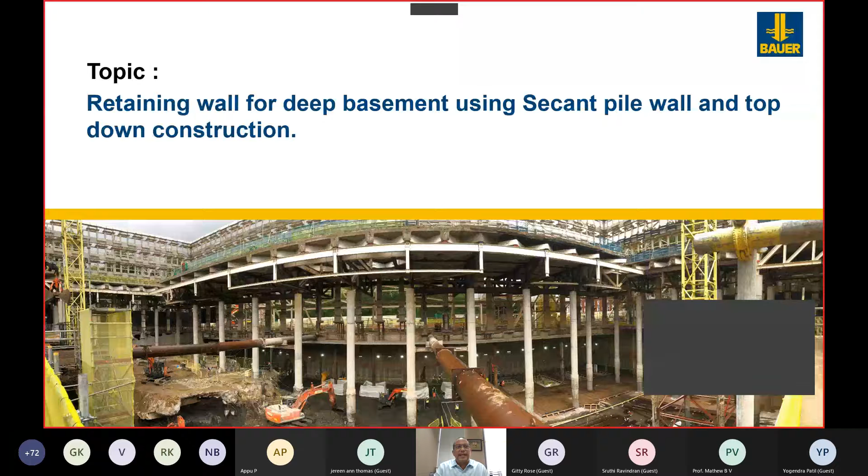For any building, there are two phases: a substructure and a superstructure. The substructure consists of a basement retaining wall and the different floors of the basement, and the superstructure consists of the various floors of the building, which, depending on the height of the building, will keep going up. But the difference is, for a building to go above the ground, the basement works need to be completed in time, and this is the most difficult part of the whole construction process.

This is a time when no overlapping work can be done on site, whereas in the superstructure works, once a few floors are constructed, other works can be started in parallel and overlapping. So the basement construction is a very critical point of the whole construction schedule.

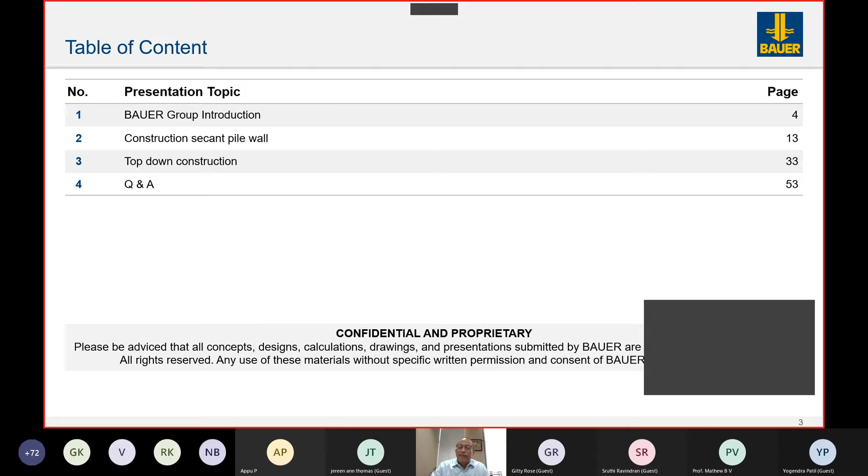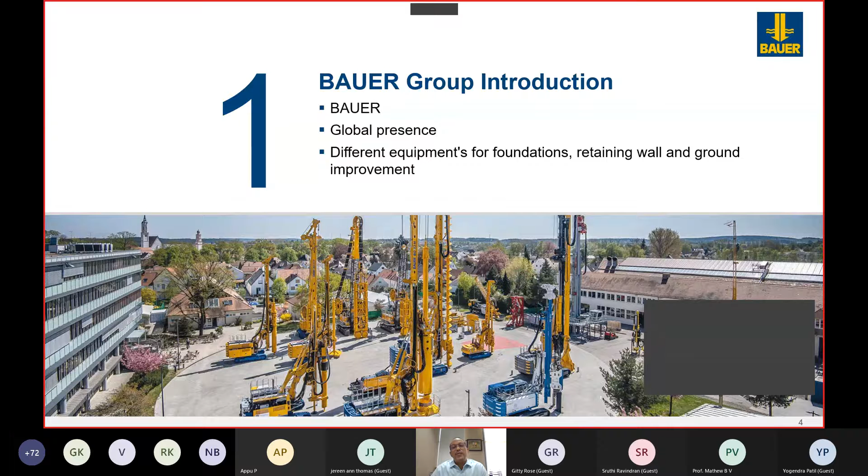For this method of works, very special equipment is needed. One of the companies who is actually very specialized in constructing these kinds of basements and also in the manufacture of similar kinds of equipment needed for these works is this company by the name Bauer. It is based in Germany, and it's almost more than 230 years old because it started in 1790.

It is present in more than 70 countries, having about 11,000 employees from 95 different nationalities. This company has been involved in very big jobs around the world.

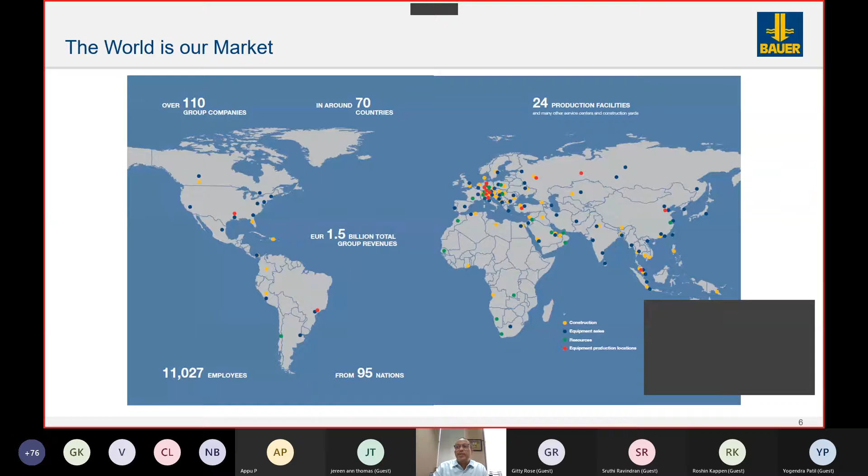To name a few, you can see from the pictures, starting from our neighborhood in Kuala Lumpur, from the Petronas Towers, all the way to Burj Khalifa, which at the moment is the tallest building in the world. And in the very near future, it will be overtaken by the Jeddah Tower in Saudi Arabia, which is 1,001 meters. All these buildings are founded on piles done by Bauer, very deep piles, 100 to 150 meters, 120 meters, of diameters 2.5 to 3.5 meters.

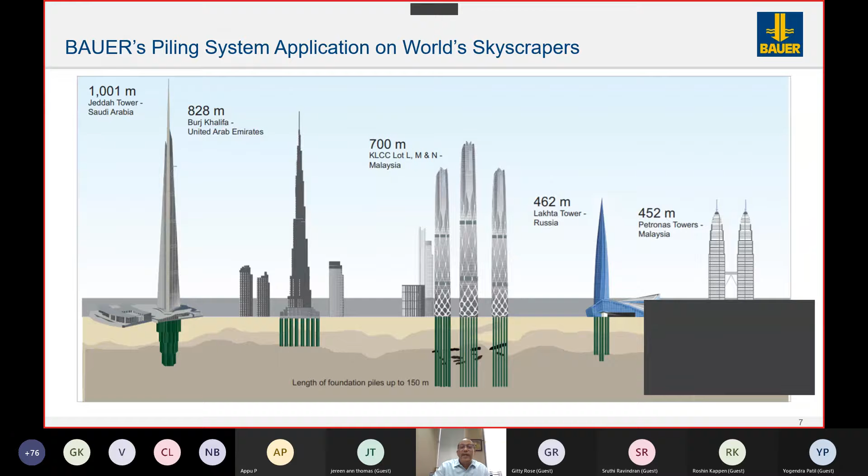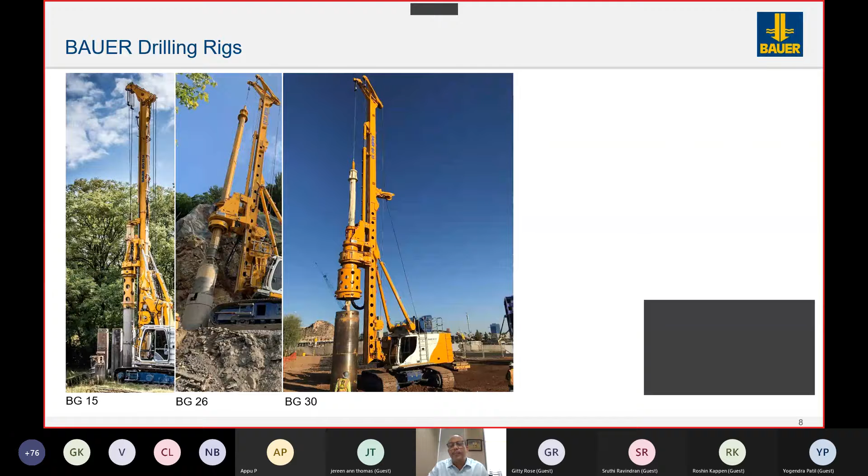Some of the equipment used in this kind of construction, and especially for the topic we are going to discuss for the basement wall construction, are the drilling rigs. The basement wall can be constructed using interlocking piles, contiguous piles, or diaphragm wall, and for this, special kinds of equipment are needed.

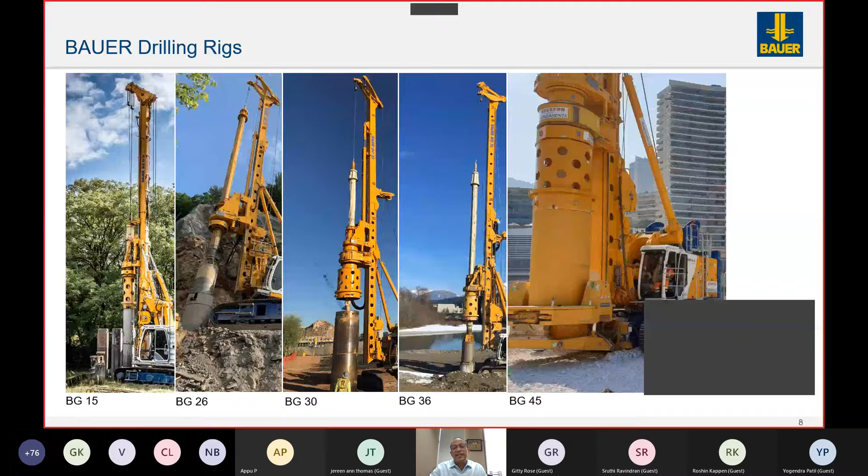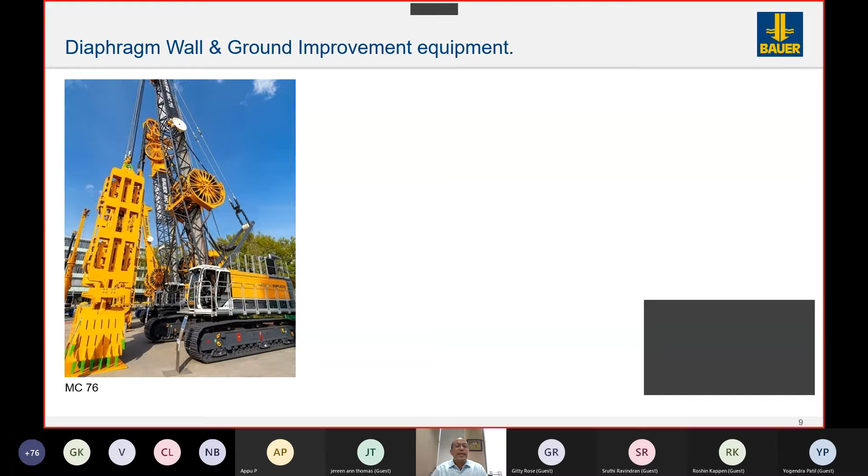These are the pictures of the drilling rigs which are normally used for the bored piles and the secant piles. And these pictures coming up are for the diaphragm wall, which is also another kind of basement wall using a grab or a cutter when you have hard material. This is another equipment used for ground improvement, shown here just for general information.

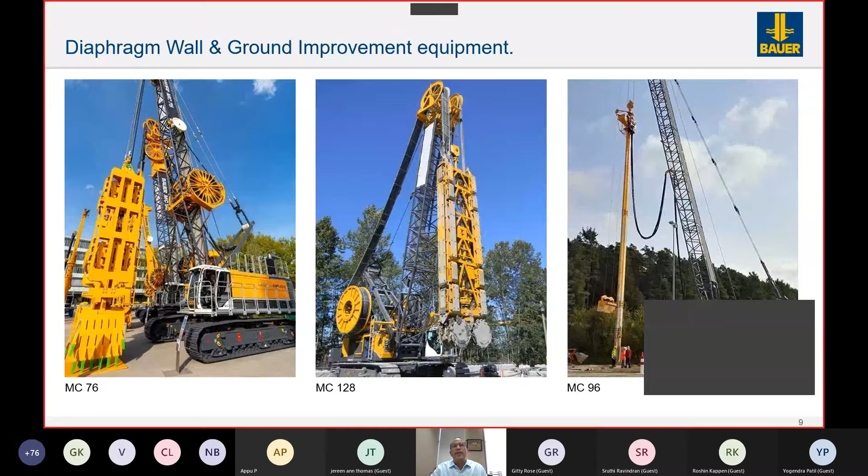So we quickly move on to the second part of the presentation, which is the construction of the secant pile. In the past, most of the basements are constructed using...

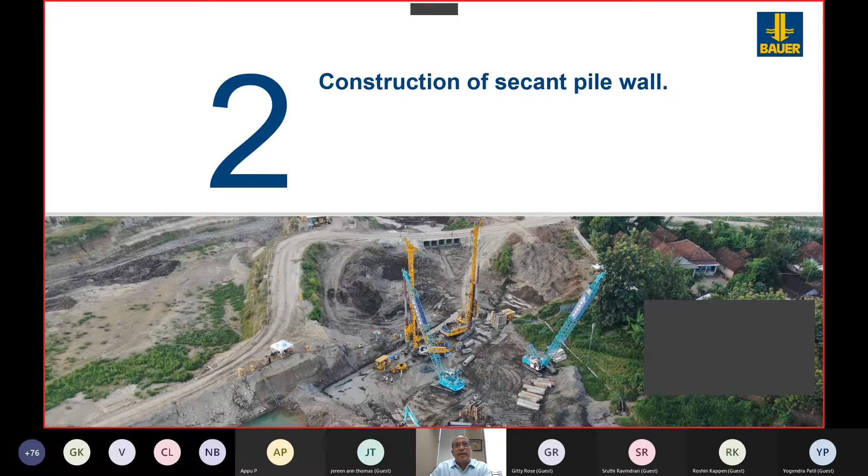Before I move on, I have to highlight that this presentation is purely from a construction perspective, covering the various steps involved. The retaining wall is made up of different kinds of piles or diaphragm wall, as mentioned earlier.

Soldier piles are used when the soil is relatively in good condition, where you can space the piles with a gap in between, and the gap is then supported by shotcrete or any kind of cement plastering.

If the soil is not really good, then we could also use contiguous piles, which are placed close to each other, but then you have the problem of water flowing through between the piles.

The topic we are going to discuss is secant piles, where the retaining wall is made up of interlocking piles built in a particular way, having unreinforced piles and reinforced piles.

In an urban landscape where land value is going through the roof, the developer needs to make use of his land as much as possible. Especially in big cities, this is made possible by building basements and also going taller, to whatever number of floors we are at nowadays, in the range of 60 to 70 floors per building. So for basements, we can also go deeper depending on the soil conditions and the design.

In this presentation, in the second part, we will focus on a particular way of constructing a basement wall, which is called secant piles. And in the third part, we will also discuss how a basement is excavated, which is slightly different from the traditional way of excavation.

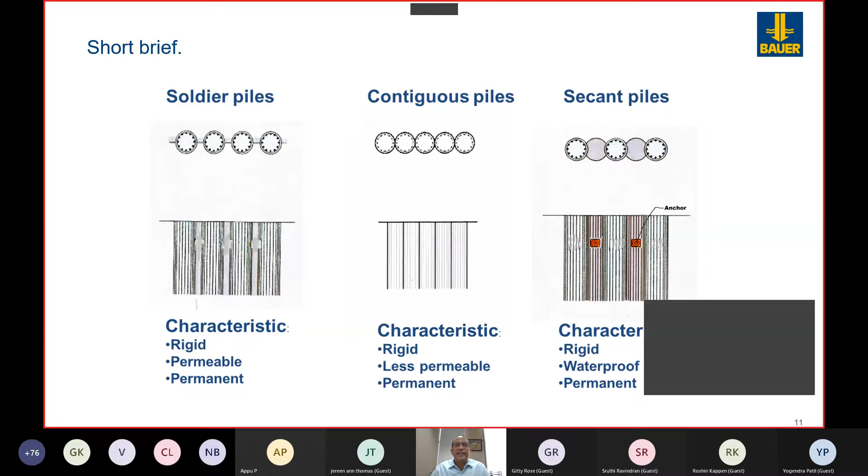So for a secant pile, it is basically built having a combination of piles interlocking each other, and the process happens in two different ways. First, the piles are drilled and cast without reinforcement, but with a certain space in between, and they are constructed for a few numbers in a sequence, all of them unreinforced.

Later on, after one or two days, when the concrete has reached its first setting strength, the equipment comes back and drills another pile in between the two already cast primary piles by overcutting into each other, thereby forming the interlocking system. These piles have reinforcement.

So once the wall is completed, this combination of interlocking piles, unreinforced and reinforced, will form a monolithic wall, which then will be topped off by a capping beam.

In certain structures like a jetty wall or quay wall, used in harbors where ships are docking, sometimes the excavation in front is very deep because of the dredging depth needed for the draft of the ships.

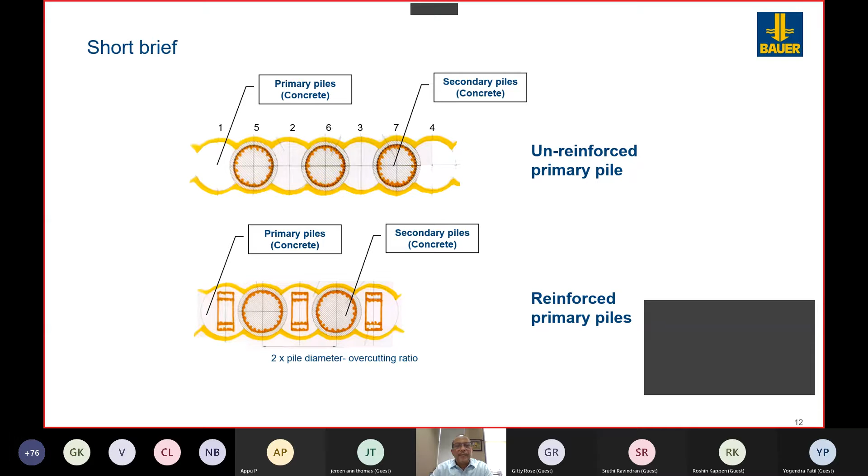In this case, the possibility of providing reinforcement on the primary piles is also done by having a specially designed cage in a different shape. This is because when you're overcutting the secondary piles, you need to make sure the steel cage already installed in the primary piles is not disturbed.

So we will go into the step-by-step process of constructing a secant pile. It consists of mainly four or five steps.

The first step is to make a guide wall, and I will go into the detail of all these steps. The second step is the drilling. Once the piles are drilled to the required design length, the cleaning is done. If it's a primary pile, it's followed by concreting. If it's a secondary pile, we have the installation of the steel cage followed by concreting. So it's very similar drilling for both piles, but slightly different in the equipment used and in alternating reinforced and unreinforced piles.

So we go into the details of each and every step that has just been mentioned.

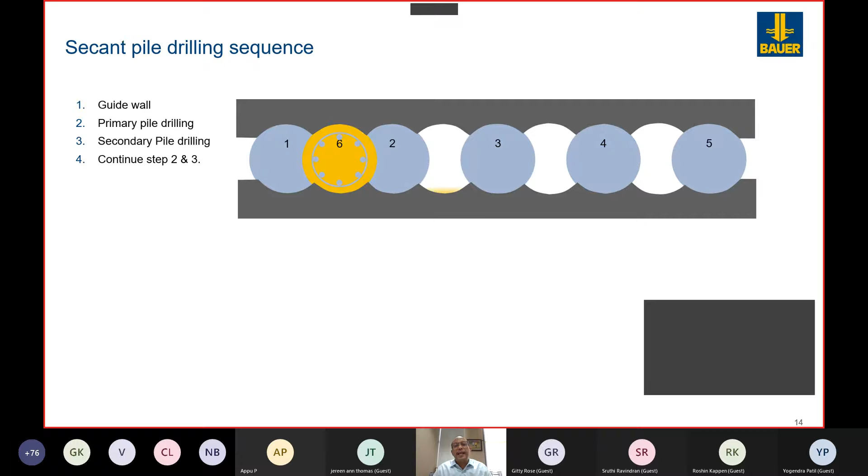A secant pile needs a guide wall, primarily to control the alignment of the piles. When you have a basement wall on the edge of your property, it's very important that it is built in the correct alignment.

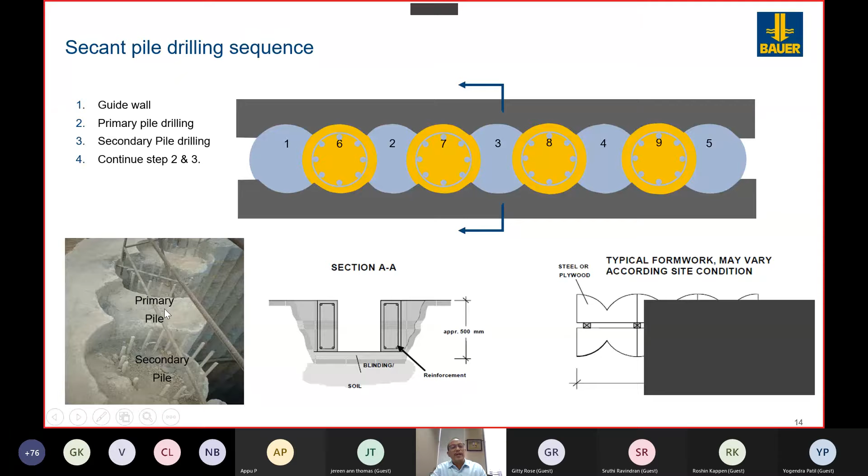How does the construction of a guide wall start? The guide wall mainly starts with excavation, followed by plain concrete, and then reinforcement placed in certain designed ways depending on the loading needed on the guide wall, and then the formwork is done.

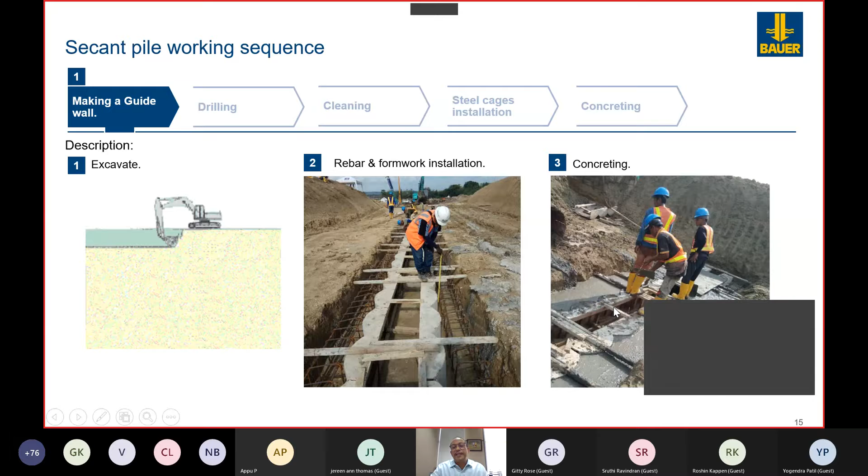The formwork is shaped so that when removed, it forms arcs into which the future casings for drilling will be inserted. This is the guide wall which has just been cast, and you can see how a guide wall looks after the formwork has been removed.

This way you can see the alignment of the wall is perfect. Each and every position of the pile is defined and numbered, so there is no confusion for the site team. They know exactly which pile is in which position.

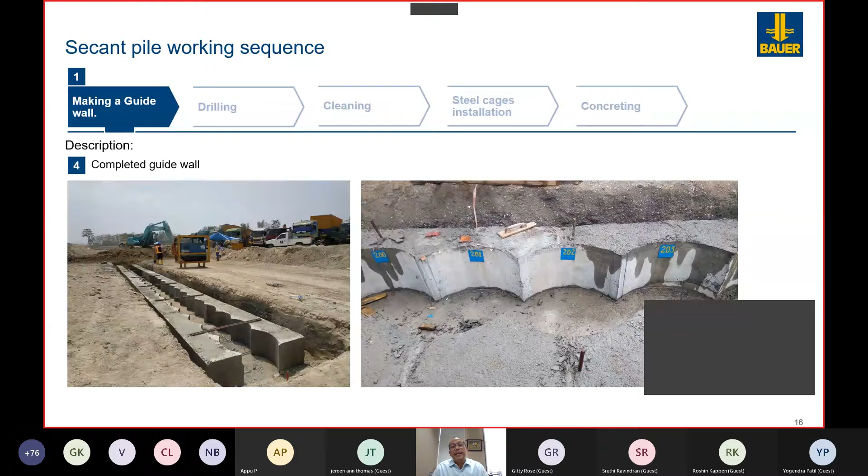Normally the odd numbers are the primary piles - 1, 3, 5, 7 - and the even numbers are the secondary piles. So whenever you see an odd number, you know it's a primary pile. As mentioned earlier, we construct a few primary piles in a line and then come back and do the secondary piles.

The drilling process is done using a special type of casing which has a double wall. The double wall is because it is constructed of two tubes, one inside the other, with stiffeners in between. On top and bottom, there is a male and female coupling welded onto these tubes. The advantage of these couplings on both sides is that casings can be joined and extended as needed, depending on soil conditions.

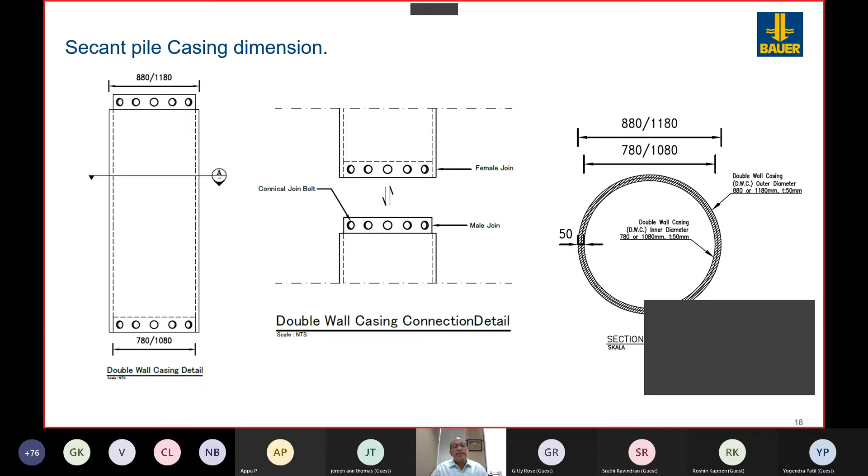As a thumb rule, in our projects the pile is drilled fully cased until the excavation depth is reached, by extending the casing piece by piece. After a certain stage below the excavation depth, when good soil is reached, drilling is continued without the casing, but the overlapping will still be done.

The drilling rig exerts the power to install the casings and later for drilling, from the gearbox. The power from the gearbox is translated to the casings through a special equipment called an adapter, which is fixed to the casings using pins.

Once these pins are fixed, the rig pushes the casing into the ground and rotates at the same time until the full length of the casing has been pushed down. Once the casing is in the ground, the pins are removed, and drilling starts.

The drilling will only continue until the toe of the casing - it will never go beyond the casing depth. The advantage is you avoid the chances of collapse, which is a very big factor for a basement wall, because a collapse causes concrete bulging and a lot of repair work later.

The second step of drilling is to join the next piece of casing using the screws or holes, which I'll detail later. This male and female coupling allows us to join casings using special screws, and by using the power of the rig, it can be pushed to a depth of about 20 to 30 meters depending on soil conditions and basement excavation.

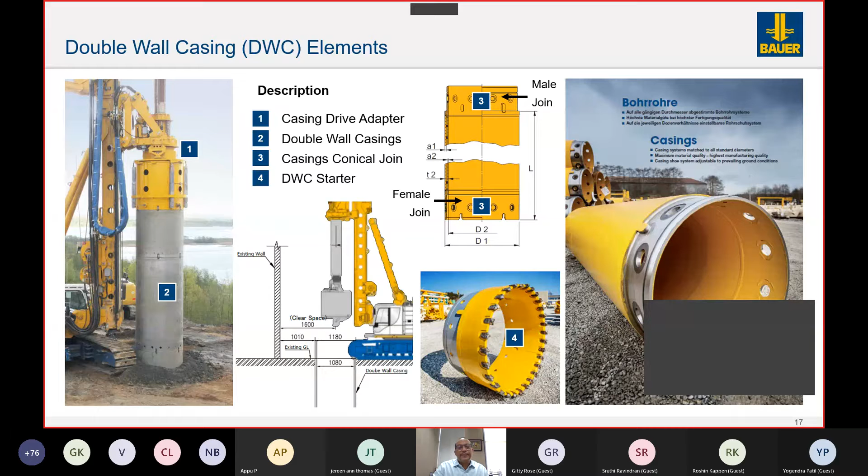So the process of drilling starts. Now that I've explained the importance of this casing and how it is structured - this first picture shows a rig about to start drilling. It is already hanging the casing after fixing it with the pins. It will be pushed into the hole in the guide wall.

Before that, verticality checks are done. All this equipment made by Bauer has inclinometers built into the cabin, so the operator is very clear about the verticality of the mast and also the casing. As an additional feature, workers also check the mast's verticality using a spirit level - that is what you see happening now.

In the second picture, you see the first casing has already been pushed down into the ground and the second casing is placed on top.

So the holes you have seen are for the screws where you will join the two casings using the conical screws. And again, the verticality check is done before the drilling is continued. In this way, the drilling is continued to the design depth.

The casings are pushed down to whatever length is already determined, depending on the excavation and also on the soil conditions. The advantage, again, is the drilling is always done within the casing, so there is no possibility of collapse, which enhances the quality of a basement wall.

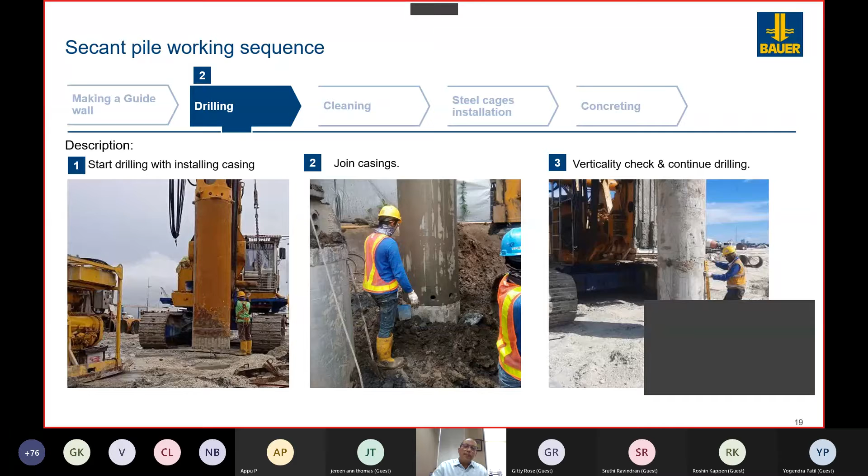But after you drill, we need to make sure the pile is vertical or the hole is vertical, whether it's a primary or a secondary. The drilling process is the same for a primary and secondary, except that the secondary has a slower drilling progress.

Because the primary pile on either side of this particular secondary has to be overcut. So the cutting of concrete by that special shoe, what you have seen in the earlier picture, takes more time than for the primary pile, because for the primary pile you are just drilling into normal soil. For the secondary pile, you have to drill into normal soil as well as cut the neighboring piles to get you the interlocking action.

So the drilling process of a primary and a secondary is the same. Once the drilling is completed, special equipment called Koden is used. This was also covered in one of the first sessions I attended in this FDP program. There was one very good session on different kinds of sensors being used for monitoring the deflections of the wall, building, and so many other things.

And this is also another use of that kind of sensor, because in this Koden machine, as the sensor portion is lowered into the ground, the results are transmitted to a computer, which you can read directly and even take a printout, which will show you exactly how the hole is looking, whether it is inclined, whether it is vertical, and whether there are any collapses already happened or not.

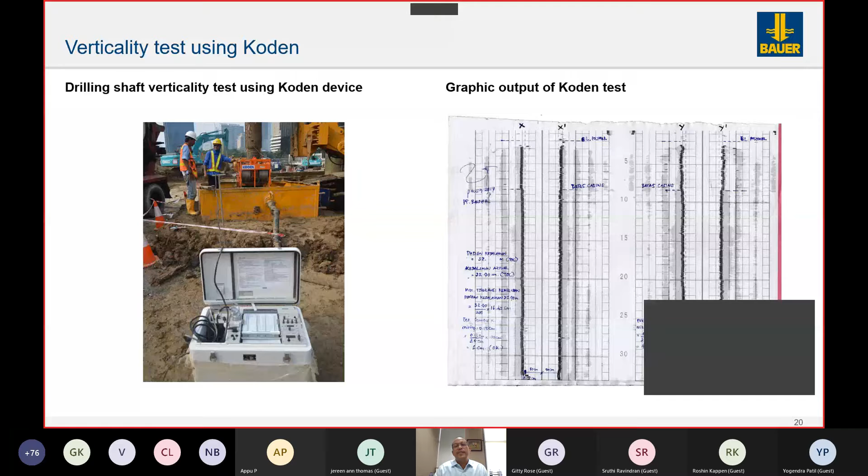So once verticality is checked, then you have to make sure the toe of the pile is clean, because during the drilling, a lot of debris would have collected at the bottom of the pile, which is the toe of the pile. This is very important, especially in bored piles, if you have end-bearing structures, you need the base to be very clean so that the designed carrying capacity is achieved.

For the retaining wall, the end bearing is not so important, but still it is not allowed to have so much debris at the bottom of the hole. There are two ways of cleaning the bottom of a hole.

One is the first picture, which is a bucket, a drilling bucket or cleaning bucket, which when lowered into the ground to the final level and rotated, has a bottom plate, a flat plate, which will push all the debris into this bucket. Then this bucket can be rotated in the anti-clockwise direction and locked, and you can pull up the bucket, so all the debris inside comes up and is disposed outside. You do this a few times, and you get a relatively clean base.

But sometimes, depending on the soil conditions, you might need to do an extra process called the airlift process. This way you actually clean out almost 95% of the fine material collected at the bottom. Airlift, I need to explain in a separate slide.

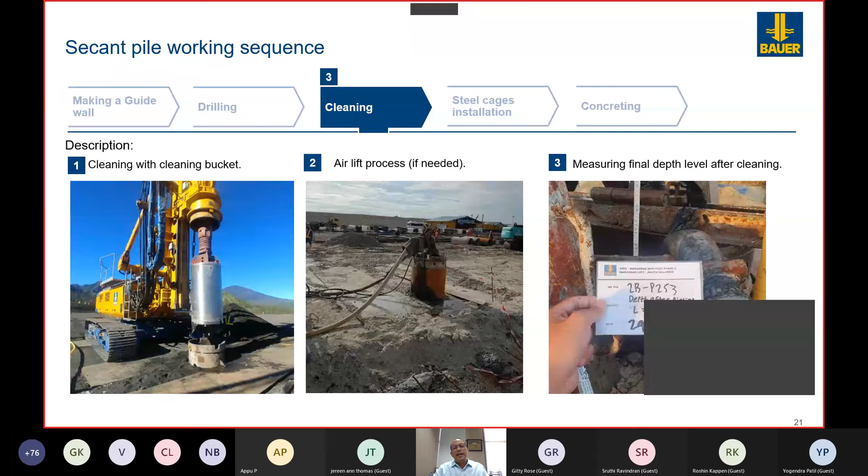Airlift is just that you lower some pipes after the drilling is completed. You lower some pipes along with the air hose right to the bottom of the hole. The air hose is connected to a compressor, and once all the pipes are in place and the disposal lines are set up, the compressor starts working and blows air through this hose to the bottom, into the pipe.

So that air will start pulling up water from the bottom to the outside and start dispersing it to the disposal lines. While this is happening, it's very important that you keep topping up the water or the slurry to maintain the hydrostatic force inside the shaft. Otherwise, collapse happens.

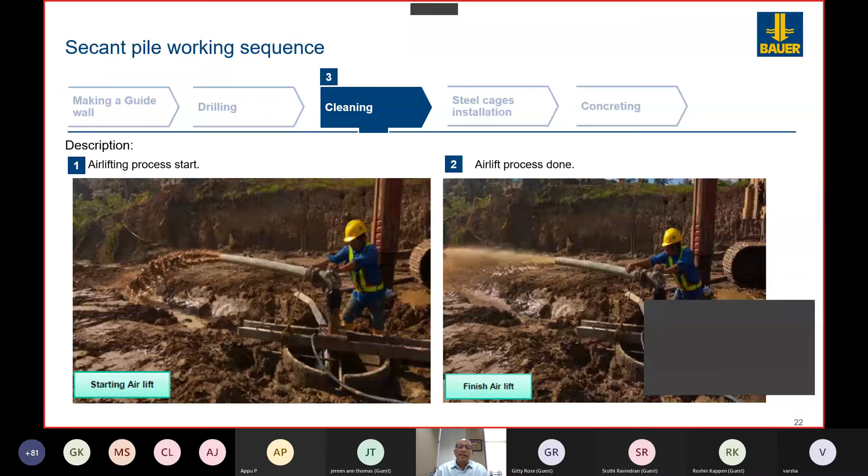This picture illustrates a very clear difference between the starting of the airlift system, where the water is brown color almost, and near finishing, you can see how much the water color has changed, which indicates that the bottom of the hole has been cleaned very well. This is one of the best ways of cleaning the bottom of a pile or any drilled shaft, if you use the proper kind of compressors and pipes.

If it's a primary pile, after the airlift process or the cleaning process is done, we can go directly to the concreting. If it is a secondary pile, then the next step is the installation of a steel cage.

Prefabricated steel cages in lengths of 12 meters are joined either by welding or by couplers, or another method is by having U-bolts tightening the splice length bars, and lowered piece by piece until the full design cage is lowered. Care is taken to make sure proper spacers are provided at the designed intervals, and also the spacing of the spirals is maintained, because these are very important factors for the movement of the wall.

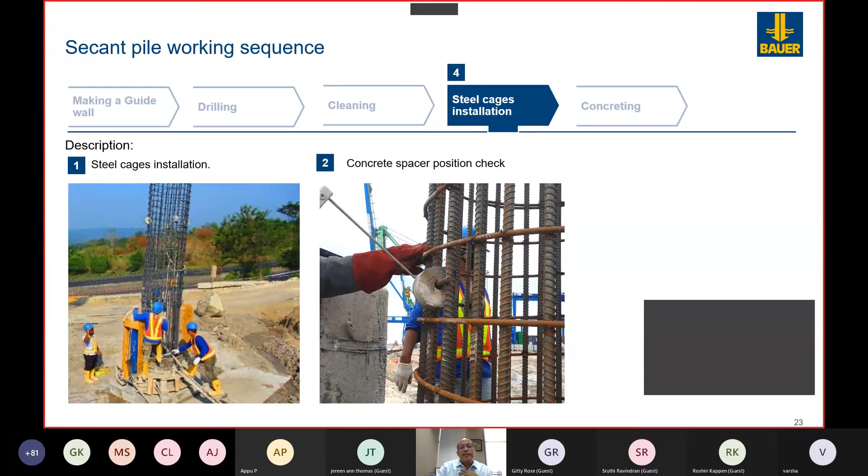If it is a primary pile, as I said, concreting has to be started. If it's a secondary pile, after the reinforcement is lowered, the concreting is started.

In both piles, which are normally drilled under water pressure or stabilizing slurry, concreting is done using a method called tremie-ing. Tremies are nothing but normal pipes having a coupling, male and female, and can be joined piece by piece, which can be lowered all the way to the bottom of the hole. The diameter of the pipe is about 250 millimeters. Once it is lowered all the way to the bottom, on the top part you will have a hopper through which the concrete is poured.

So the concrete trucks which have been ordered by the site management would be on site, and as soon as the tremie lowering is done, the concrete trucks come near to the hole and discharge the concrete directly into the hopper. This is again another place related to the earlier presentation made by a gentleman who spoke about materials, workability, and slump retention.

For concrete using a tremie pipe, it's very important. The word he used was self-compacting concrete. This is one of the places where self-compacting concrete is used. Any concreting done under slurry or water uses self-compacting concrete.

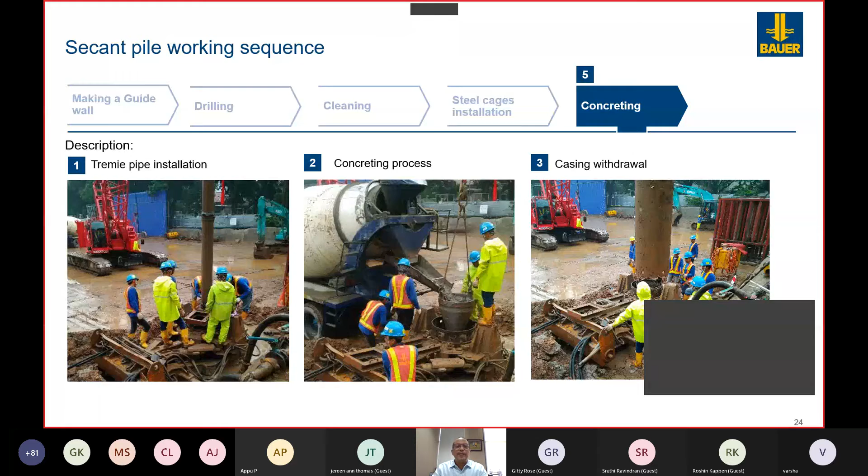In fact, there is a special equipment which is used to extract the casings, which is called an extractor. And how this extractor works, I will show it to you in a video which is coming up.

This extractor is placed before the concreting starts, as you have seen in the other picture. This is where the workers are standing, on top of the extractor. So once the concrete is ready to be cast, the extractor is placed around the casing, and this extractor with hydraulic jacks, which can clamp the casing and pull it up using a special power pack, is used for extracting this special type of casing used for the secant pile.

So this is the video. Can you see the video? Hello? Yes, sir. Yes, sir. Okay.

This is an extractor which is actually pulling up the casing in about 50 centimeter lengths. At the same time, the casing is held by the crane. You can see the sling. And once it reaches above the joint level, the workers will stop the operation of the extractor, open the screws and release the casing, which will be set aside. And then concreting will be continued.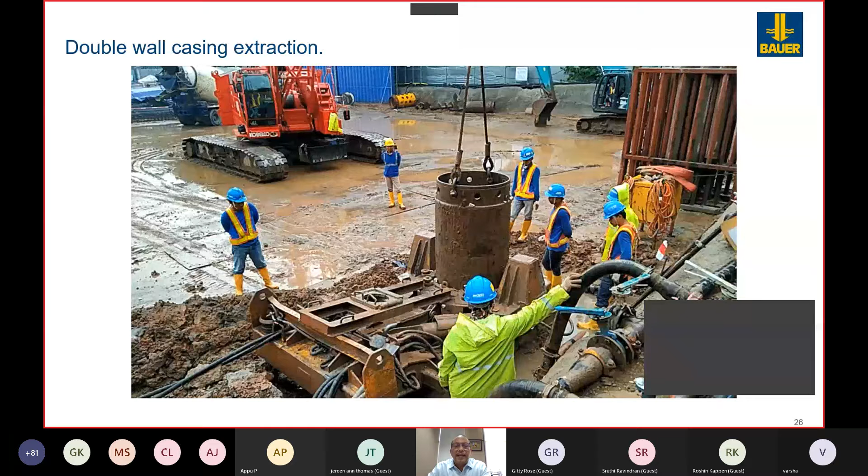So in this way, the primary and the secondary piles are cast by having an interlocking system, and this basement wall is constructed. So this is one of the first steps in terms of basement construction. You need to have a basement wall built along the perimeter of the basement.

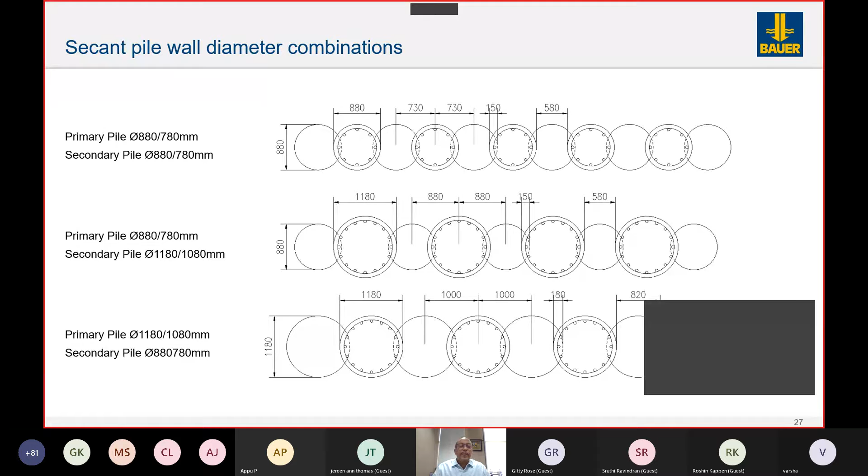So there are three different ways we do it here in Indonesia, but different companies around the world have different diameters available, and that can be designed according to what they have. So this is a very short description of how a secant pile is constructed, and I will now show you some pictures from completed projects to show how a secant pile wall looks after excavation.

The first picture you see is for a pump station which was built in the middle of a river. This was a very challenging project where the water level of the river was above our working platform, so we always had the risk of flooding, and luckily we never had that difficulty because everything went off very smoothly.

The working platform was retained by a sheet pile wall around it, and this was backfilled. Our equipment was loaded into this using cranes, and this wall was constructed. After we left the site, the main contractor excavated the basement, or this pump pit as they call it, which is basically a basement, and it was retained or supported by steel struts.

This is one thing I would like to highlight, because these two pictures are very important for the second part of the presentation. In traditional basement construction, there are two ways you need to support your wall, because when you excavate in front of a wall, you get deflections, and no wall is built to have a freestanding depth of 20 or 30 meters. So as excavation progresses in the traditional way, you need to support your walls from caving in. These are the two different ways of doing it: one is using struts, which is very common, and the other is using ground anchors.

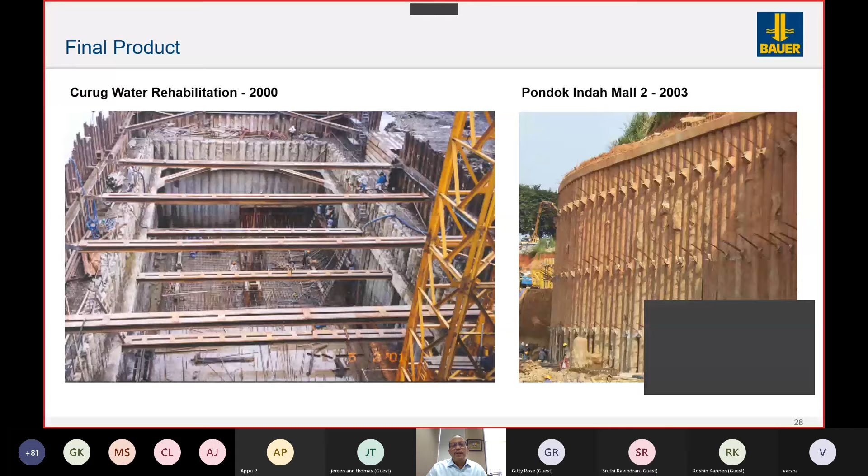Let's move on with pictures of the secant pile from constructed projects, which give you a better understanding of secant piles and the basement.

This is a car park basement for a bank central office in Jakarta, also using secant piles, where you can see the surface is so clean and the alignment is good.

The surface of the secant pile actually depends, it has nothing to do with our workmanship. It will depend on the type of soil which will be sticking to the fresh concrete as soon as the piles are cast.

If you have clay material, you can easily scrape away the soil from the concrete surface when you do the excavation. But if you have sandy or silty material, you will have large chunks of soil sticking to the concrete. That is not a collapse, it's just the soil catching on to the fresh concrete, and later you need to chip it away to get a relatively clean surface.

The second picture, shown in circular shape, was a very challenging job in Bali. It was a project which needed a bridge built on bored piles.

But because the slopes of the mountains were so steep, there was no possibility of doing a large number of bored piles. So the designer came up with the idea of doing caissons.

A 9-meter caisson was planned, but then he had the problem of pushing down traditional casings like steel or concrete for this 9-meter depth.

It was not possible, so we worked together on this design, and it was decided we do a caisson using secant pile. So the secant pile acted as the wall for the caisson.

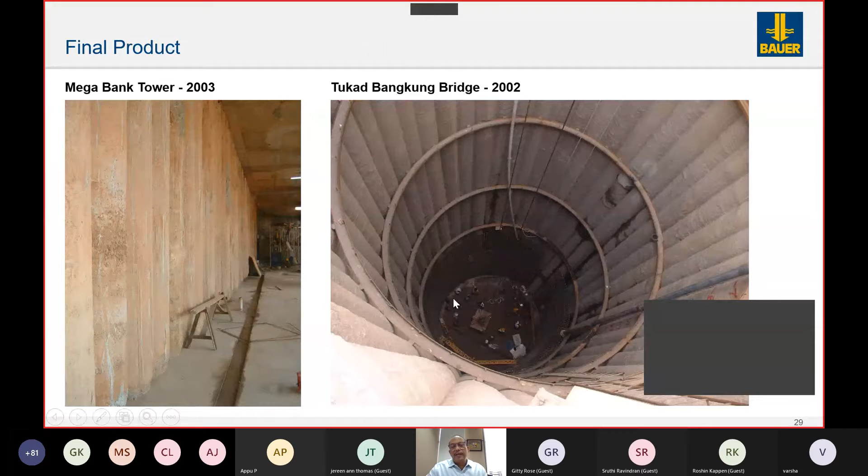Another job in Jakarta for an office tower using tie-back ground anchors, the traditional way of excavation, building up right to the bottom slab, columns being built, and later connections to the beams to support the columns.

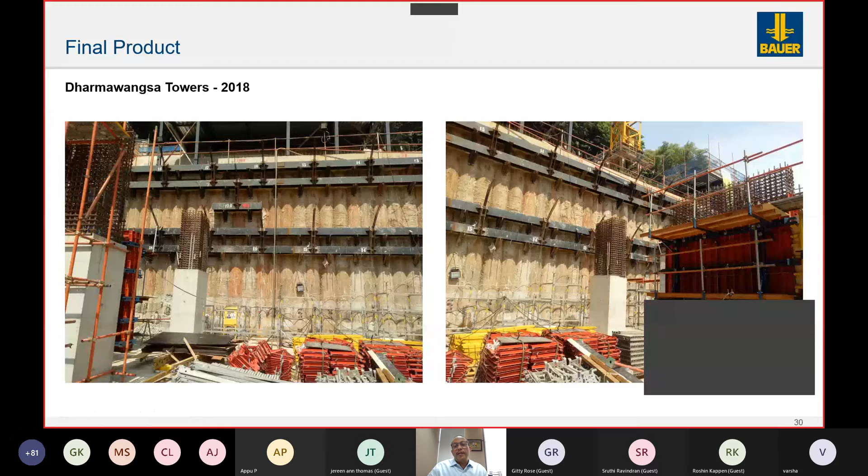Very normal construction. This is another picture for the same shopping mall I showed earlier, from the inside of another part. You can see the anchors are there.

This client had a building neighboring this construction pit, and he wanted his people to have connectivity, because they own most of the buildings, so they wanted a link to the next building.

So they asked us to install some columns in piles only for supporting this bridge, going from one building to the next across the site. Since all three buildings had the same owner, it was easy to build.

But this picture has a bit of significance for the second part of the presentation, actually these kinds of columns inside the piles. So besides doing the retaining structure, we also installed piles up to the ground level.

And while the concrete was still fresh in the pile, beams were plunged in, which acts as a support. The beams are held in position by a certain method, which I'll show you later.

Later on, a bridge was built connecting all these king posts. This acted as a temporary column support for this bridge, because the pile could not be built above the ground, as you cannot have casing standing above ground level. The piles maximum can be constructed only until ground level. So in this case, the piles were cast until ground level, and as the concrete was setting...

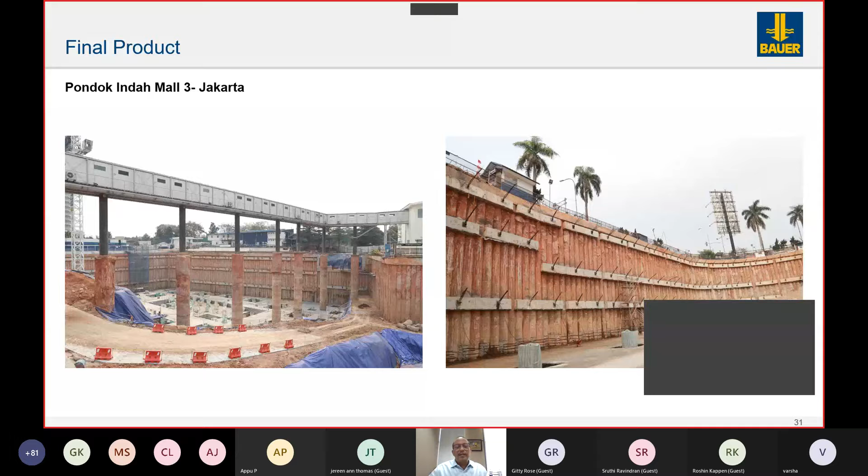Normally for self-compacting concrete, you have a retardation of about 4 to 6 hours, so it's very easy to plunge in columns when the concrete is still wet. This was done for this kind of reason. A similar reason will come up in the second part, which we will move on to now.

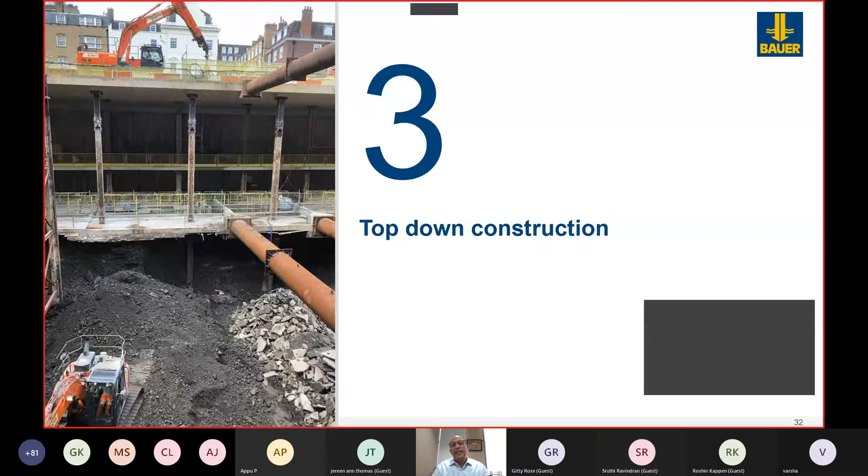This is now the top-down construction. Traditionally, basements have been constructed by excavating all the way to the bottom until the final basement level is reached, and then the building is built upwards.

The next few slides will give you an idea how construction can be done from the ground level itself by casting slabs supported on temporary columns. As the construction progresses downwards, slabs are constructed at whatever levels they are, even before reaching the final basement level. This is a very interesting way of constructing a basement, because you save a lot of time.

Before we continue, maybe it's a bit confusing now, because if you see the slides and pictures we are going to show you, I'll first show you some drawings which we have made to help you understand how it works.

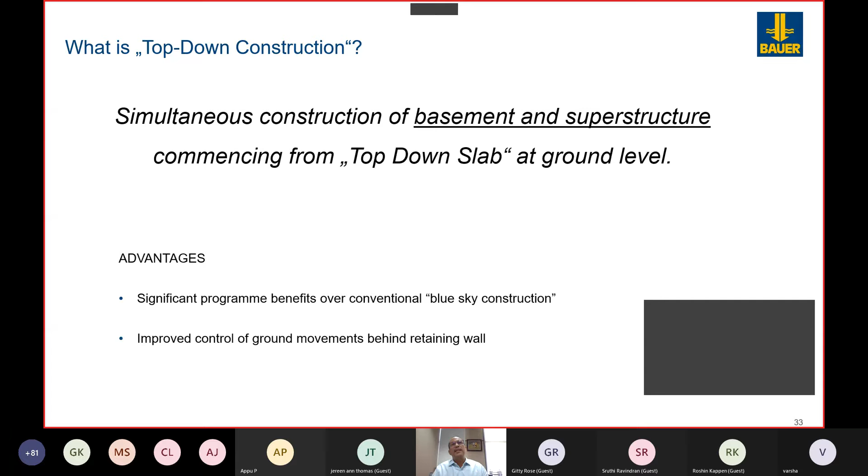The drawings will illustrate a complete package of the retaining structure, the bored pile, and the king post installation. In the detailed last part of this presentation, we will focus on what a king post is, how king posts are installed, and what their functions are, because that is the most critical part for top-down construction. Why it's called top-down construction, you'll understand at the end of the presentation.

So we have a greenfield project here in this picture which we have drawn for you. There is nothing on that ground. First, we start with the guide wall construction for the retaining structure, which we have already discussed earlier.

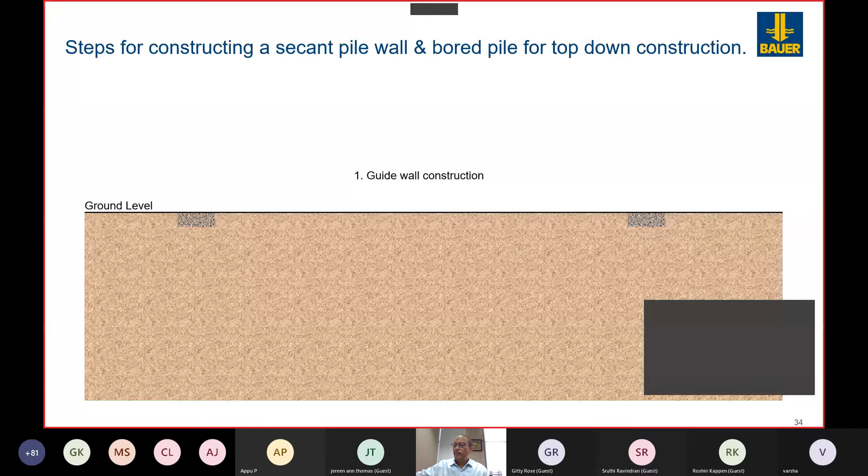Then we start the construction of the secant piles, on the left and right extremes. The narrow ones you see are the diameters for the retaining structure, the secant pile construction we saw earlier. The middle three are the board piles, which obviously will be of bigger diameter, like 1.2 or 1.5 meters.

For our company, the biggest diameter we have done is about 3.5 meters, down to about 85 meters, in Kuala Lumpur. So bigger diameter piles are drilled and then concreting is done. This is just an illustration to show these things aren't always done in exact sequence—sometimes the retaining wall is done followed by the board piles on one day, and the secant piles the next day.

But just to make it easier to understand, I'm showing you that now in the picture, the retaining wall has been cast, and the board piles have been cast also down to the ground. This is where the change happens from the traditional construction.

Normally, in a typical case, as soon as the bored pile construction is done and the project is completed, the foundation contractor will leave the site, and the main contractor takes over the work, starting the traditional excavation of the basement and then doing the tieback system using struts and anchors.

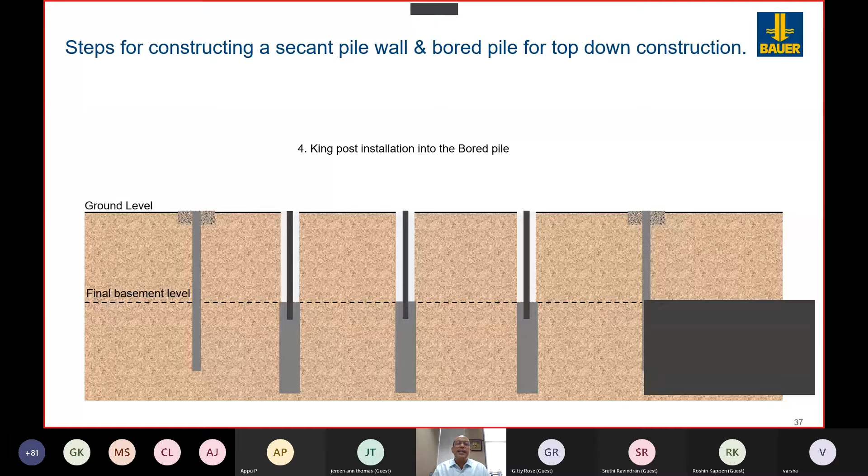But in this condition, this is where the change happens. As soon as the bored pile is cast, pre-designed steel column elements are plunged into this fresh concrete. As I told you earlier, these are the temporary columns until the basement construction is finished, and until then, these columns will carry all the slabs cast during the process. If these columns are designed properly, as the excavation goes downward, the construction of the building can actually go upward at the same time.

As soon as the columns are finished installation, the backfilling is done and the top of the king post is held in place in a special method. I'll get into the detailing later. But to give you a picture of how things work overall: the king post is plunged into the bored pile, then the top is secured and backfilling is done. Once the concrete has reached 2 or 3 days of strength, the top of the king post is released and the casing is extracted.

Once all the boat piles are done - the foundation doesn't need a king post at every pile. There will be a group of piles under a column, so only one king post in one of those boat piles will carry the temporary load, since the full loading is not yet coming. So as soon as the foundations are done, including the retaining wall, bored pile, and king post installation...

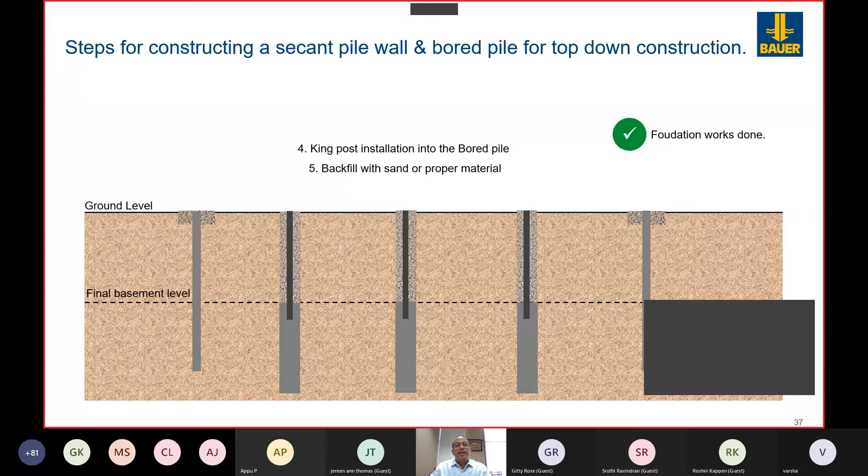We need to cast a capping beam. Along with the capping beam, the ground floor slab is cast. This is where the changes are happening. Before, this slab was only possible once the basement is built - say with 3 basement levels, you'd cast the final basement slab, the second basement slab, the first basement slab, and only then the ground floor slab. In this case, the ground floor slab is cast first.

Then, because there will be some openings in the ground floor slab, an excavator is lowered into those openings and excavation is carried out below that slab. So you're already starting basement excavation even before reaching the final level, while the ground floor slab is already constructed. All these steps will be clearly explained with actual pictures from projects, but this is the process of how it happens.

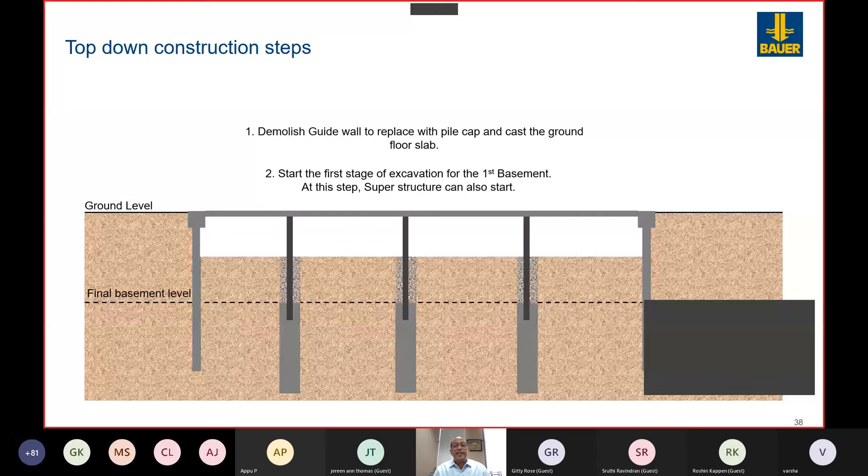So now we've reached the first basement slab. I've taken an example of only 2 basements to make it faster. Your ground floor slab is cast, you excavate down to the first basement level, then cast the first basement slab. So even before your final basement, two slabs are already constructed. Now the excavation for the final basement is done, followed by casting of the final basement slab.

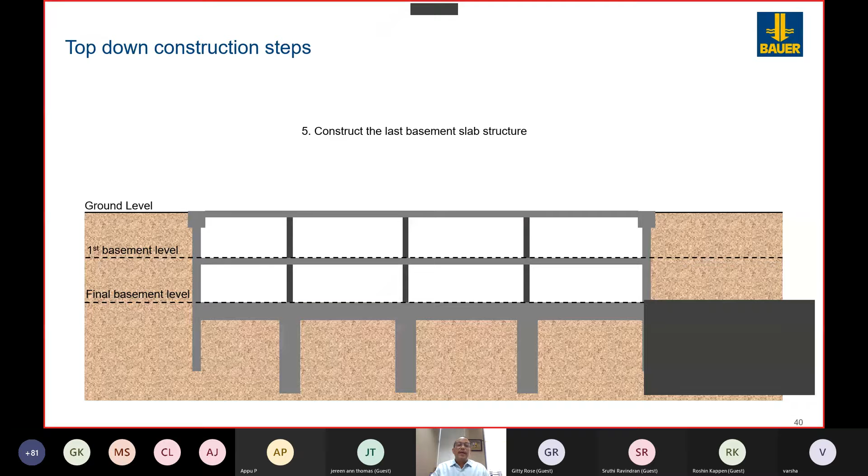Then the columns start going up, because these king posts are part of the steel requirement of the final column design. Since these king posts are very heavy steel members, nominal reinforcement of usual diameters like D25 or D32 is placed around the steel member, and casting is done to form the final column. So you see, the construction of a basement is not bottom to top, it's top to bottom - that's why it's called top-down construction.

But there's a possibility, which I'll show you in pictures later - if the king posts are designed strong enough to take the load for a few floors above the ground, you can construct as soon as the ground floor slab is built. Part of the team does the excavation below ground while the other part starts constructing the superstructure for a few floors.

The experience we had in Jakarta - this is normally done by the main contractor - was that by the time the contractor reached the fourth basement slab, the building was already 9 floors above ground. That was the balance struck in the design; you cannot go higher than that. After that, you need the real columns to support the load and transfer it to the boat piles.

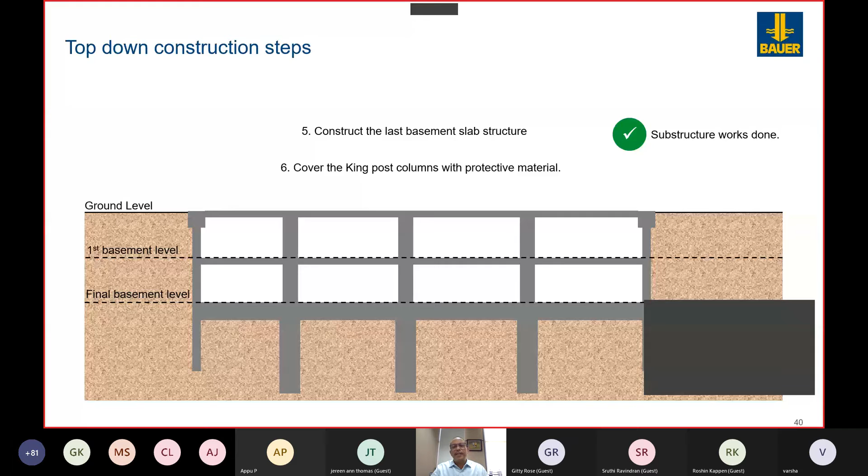So this is a very inventive way of constructing a basement, especially in urban areas where space is very limited, and there are other constraints which I'll explain at the end of the presentation.

So what is a king post? It's just a steel member specially designed to take certain loads. Here the design part comes into play, because the designer must be very clear on the loads carried by the steel members. Wherever there is a plunging length into the bored pile, you have shear studs to transfer the shear loads, and on top you have the plate to support the ground floor slab and the beams, which is the first part that's cast.

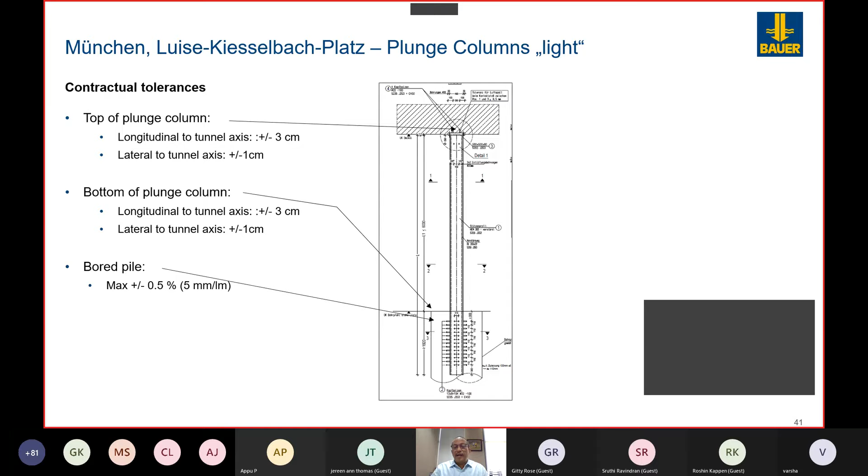So we go into the details of installation of a king post, because that is a very critical part of this method.

The critical part is, if the king post is not in the right place, the whole thing is out. So this is a very tricky job which needs a lot of precision, a lot of good design, and a very good contractor who knows really what he's doing.

The installation of the king post is mainly controlled by the template placed on the casing. Normally the template has dimensions, plates, and flaps which can be opened to allow the king post to pass through. This template is placed on top of the casing, in the right position and alignment, perfectly controlled to make sure the king post which comes later goes down into the correct position of the pile.

Because once you fix the template, once the pile is cast in the right position and the template is placed on top of the casing in the right position, there is no way the installation of the king post can go wrong. Being such a heavy steel member, it just will not go anywhere except to the place where it's supposed to be.

So this is a template, and this is how the king post will go into the casing. The casing is still in the ground because you will not extract it until a few days after the king post is installed, because this actually holds the king post in place until the strength of the concrete in the bore pile is achieved.

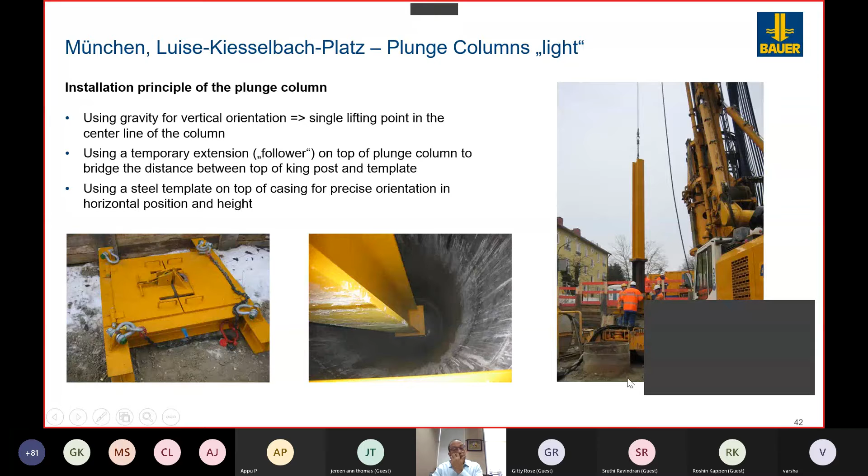You have to understand that the holding of the king post is only that 2 to 3 meters of plunge depth into the pile. The lowering is done using a crane and controlled by a group of people, which we have a nice video coming up later. So here we go.

So the concreting is completed for the bore pile. Immediately the surveyor and the engineering team come and mark the axis on the casing, on top of which the axis of the template is matched and kept in alignment, and is fixed by special screws so that the template will not move. It's very important the template should not move, because if it moves, the king post will be in the wrong position.

It might still go into the pile, because if the piles are big and the king post dimensions are smaller, it will go into the pile, but it might not be in the center of the pile. So you will have an eccentric loading on the pile, which is not good for the loading point from the design side.

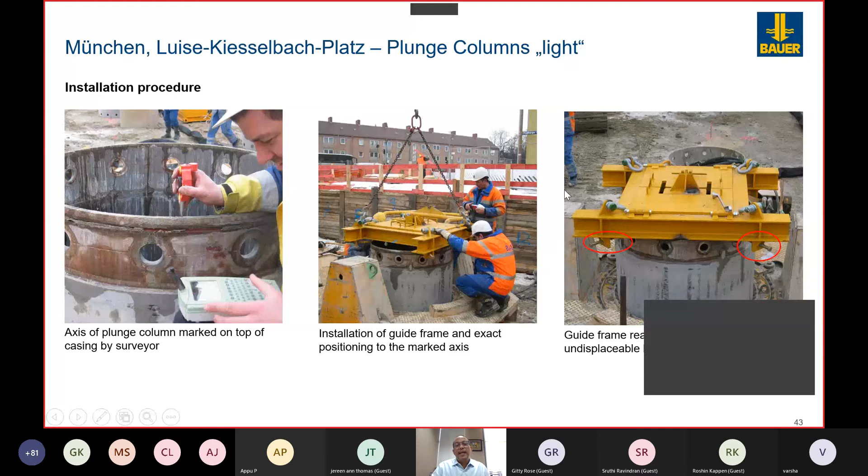These 3 steps are done in about 45 minutes. During this time, the crane carrying the king post will be coming near to the casing and waiting.

As soon as the template is fixed, the flaps are opened, and the king post is lowered slowly and controlled, monitored by the surveyor to make sure it's going vertical and all the way to the correct levels. Then the flaps are closed, some pins are added, and then it will be welded so the king post will not move. It's in the right place, and that's the end of the installation of the king post.

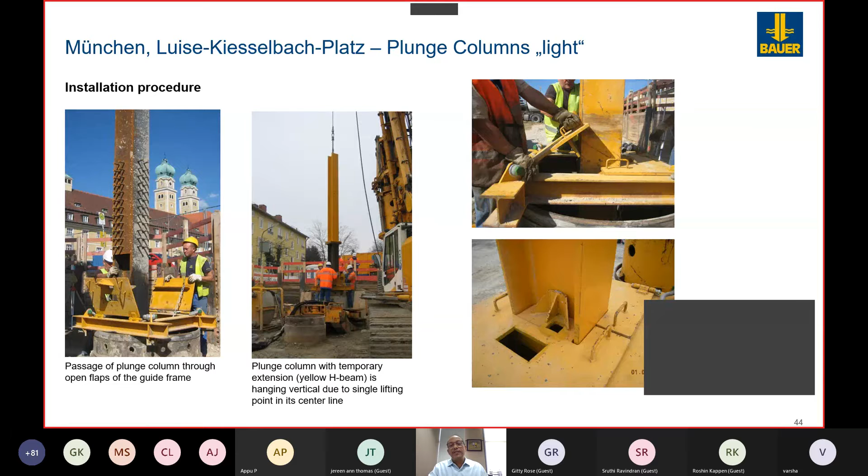So you see a picture here, I think this is from Germany. Some piles in a line already have king posts installed, and they are waiting for the strength of the concrete of the bore pile to be reached.

Normally the initial setting strength is enough, so within 24 hours the flaps are opened. Backfilling is done with fine material to keep extra support on the blind bore of the pile to support the king post, and then the template is removed, and also the casings.

This first picture shows you one of the first pictures of a basement, showing how this king post will look when it is inserted into the piles at cutoff level. This picture is taken much deeper in the ground, but it's shown now just to give you an understanding of the king post already plunged into the pile. This cutoff level would have been maybe about 18 or 20 meters below ground.

And this is how it looks. You can see it is almost in perfect position in the center of the pile.

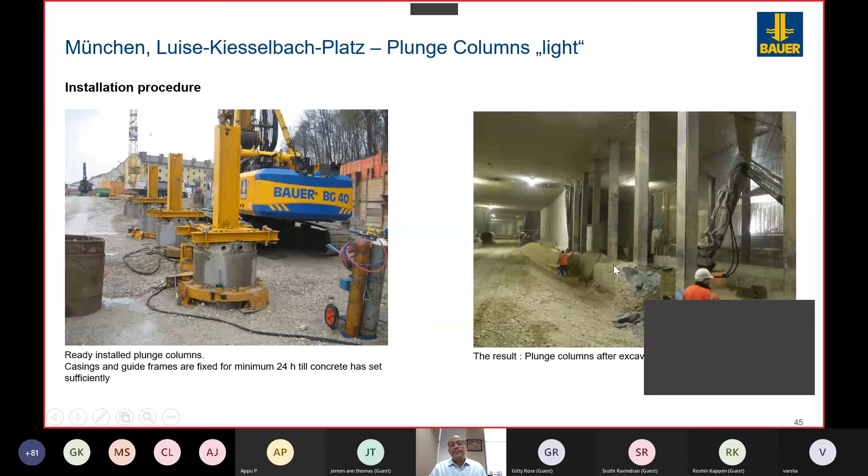Okay, so we will now see a short video about how the installation of the king post happens. The video starts after the template has been placed on top of the casing and fixed by the special screws, and the crane is now coming with the king post hanging, and now you'll see how it's happening.

This was a picture taken from the project in Jakarta for the World Trade Center.

It's done at a bit of speed, so we don't waste too much time watching it. So the crane is coming closer. There is a supervisor who controls the movement of the crane.

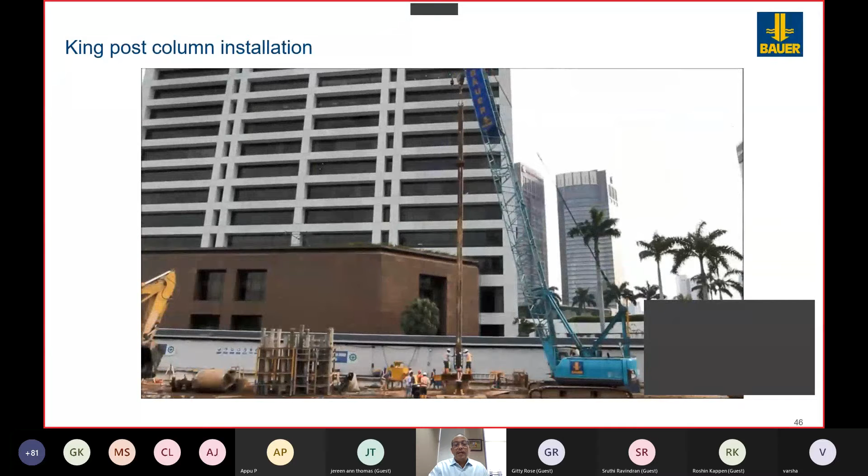In this case, we also had an inclinometer fixed on top, which you can see an orange cable coming down. This is the orange cable, and it is connected to a computer, so that the inclinometer will give signals you can read on the computer, showing whether, as an extra step which is part of Bauer's quality control, the king posts are going perfectly vertical.

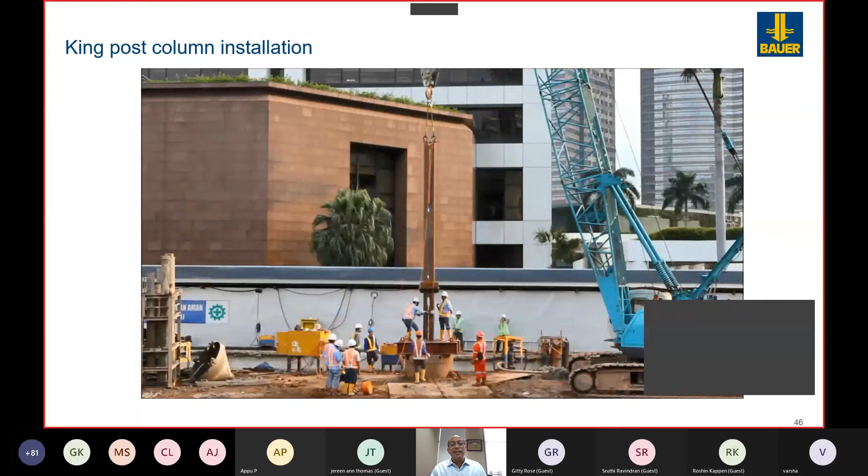So when you need to open the flap, you open it when there is a joint for the king post, because some members are not long enough to reach the final basement and you need joints. So the king post is lowered by this crane.

Surveyors are monitoring this from a distance using a total station. The inclinometer is also giving directions to the computer. Supervisors and engineers are checking to make sure it's going down vertically. People are taking photographs and videos from the client side. A lot of things happen.

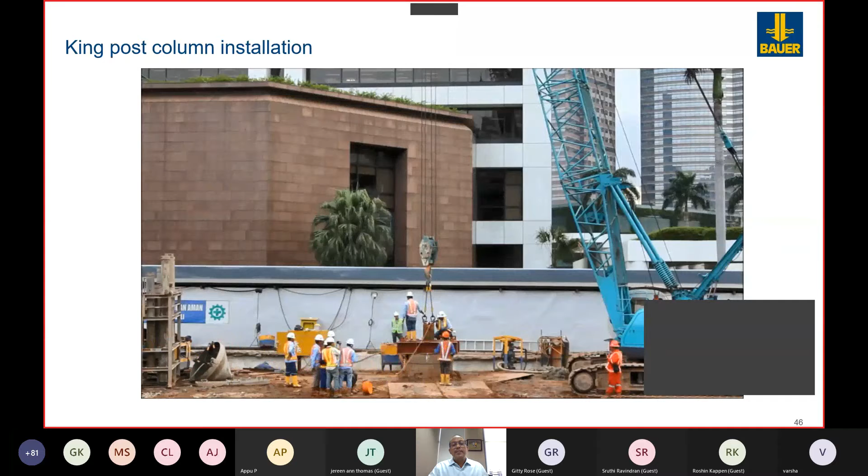So there is a mark on the king post which allows the supervisor to know when to stop lowering it, because that's all based on measurements from the basement depths, the cutoff level of the piles, and the final position of the ground floor slab.

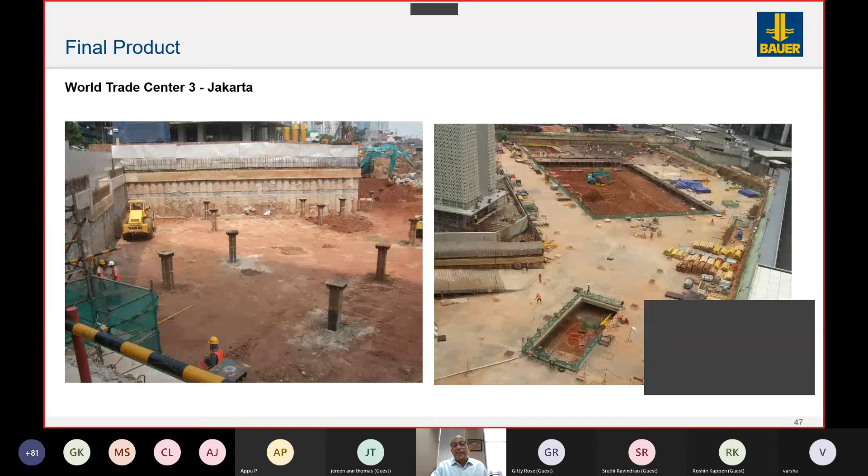So this is the first slab which has been constructed, which I've told you is the ground floor slab. Some more pictures to give you an understanding of what is happening. Some piles which have been cast to the top need to be chipped down to the actual levels. Trucks are all waiting.

This excavator will bring some soil near to the edge, and this excavator will load it into these trucks. So there is a sequence of works which is happening at the same time.

In this second picture, you see there is on one side a casting preparation is getting ready. Steel bar is being readied to cast the next level of basement. This is the ground floor slab as you have seen with the openings. This is all from the same picture or the same site, so you can relate in terms of continuity.

So below the one part you can see the works for the next level of basement is already in progress. The lean concrete has been done. The steel bar fabrication for the slab is going on, whereas on this side the excavation is still going on, and maybe some other excavators already below the slab inside, deep inside, excavating and then moving soil to these openings. So a lot of works going on.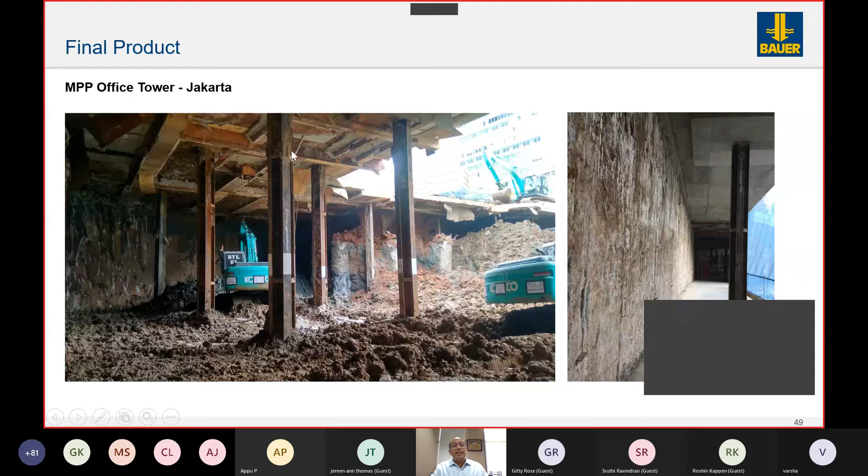Again, some more pictures are taken from inside the basement. Very beautiful pictures, which gives you a good understanding how things looks like. The wall looks beautiful, no bulges, perfect king posts supporting this ground floor slab. This will be the king post what we have installed earlier, which you have seen in the video. Again, the next level of slab, due to some reason, the height is a bit higher than the excavated level, so they have the base scaffolding done.

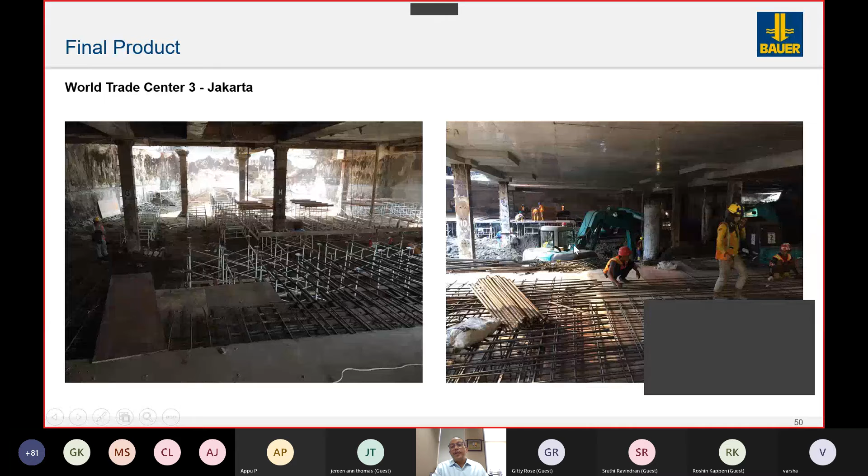This excavator is already into a deeper part. Slab construction going on, tying of rebar going on.

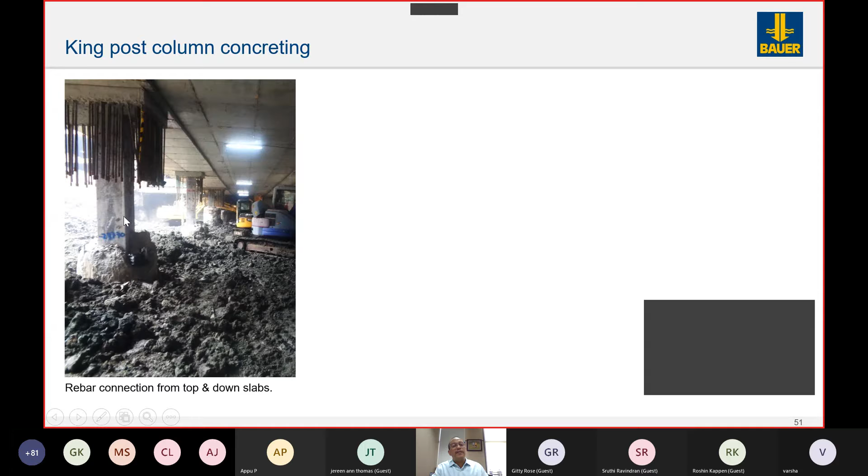So when you're casting the ground floor slab, you actually are putting the reinforcement for the future column, for which the king post would be part of the central part. This is where the reinforcement starter bars are hanging. The second picture, you see some connectivity being done to complete the length of the column.

The two floors, this is the second basement. The first floor is there already. So you need to cast this column into a proper column as per the design. The king post, remember, is only a temporary structure, a temporary column to hold the temporary loads.

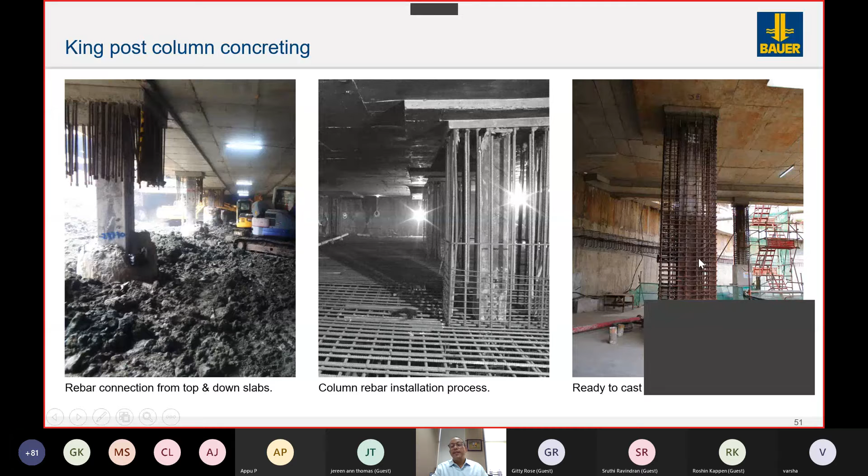This is a fully column fully connected with rebar, reinforcement bar, and now the formwork will be put around this and the normal concreting will be done. There is another one here. So this is how the basements are constructed step by step.

This is a beautiful picture which I told you as before. If the king post is designed properly, you can have the structure going upwards and basement construction going downwards. This is the absolute fastest way some building can be made.

I think this was one of the projects which I mentioned. The basement was about 4 or 5 basements, and by the time they finished that, this building was already about 9 floors above the ground. So not only the basement, they are not waiting for the basement to finish.

That means when you have these floors getting ready, overlapping works can be started, like masonry work or electrification or plumbing or whatever. So this actually speeds up the construction process. That's why in modern countries, because of these new kind of techniques, buildings are built very fast.

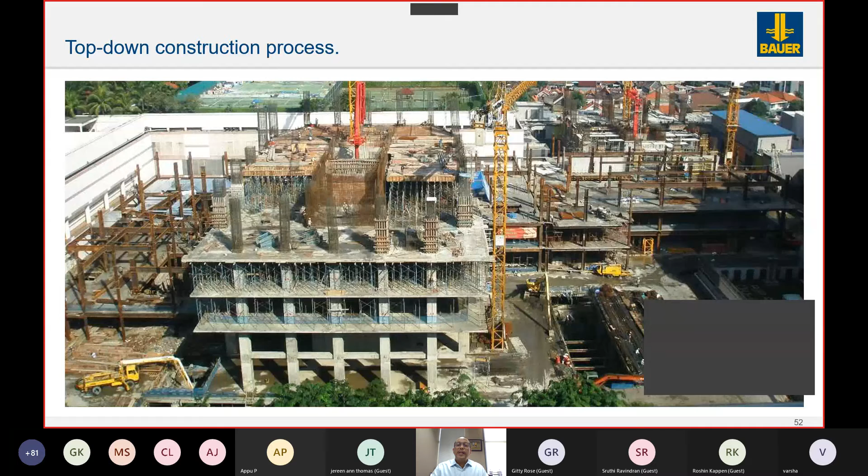Here you can see the superstructure, this part is already going on, and the other part is a similar picture from before, where the excavation is still in progress because the basement is not even completed. Yeah, this is the basement construction part going on.

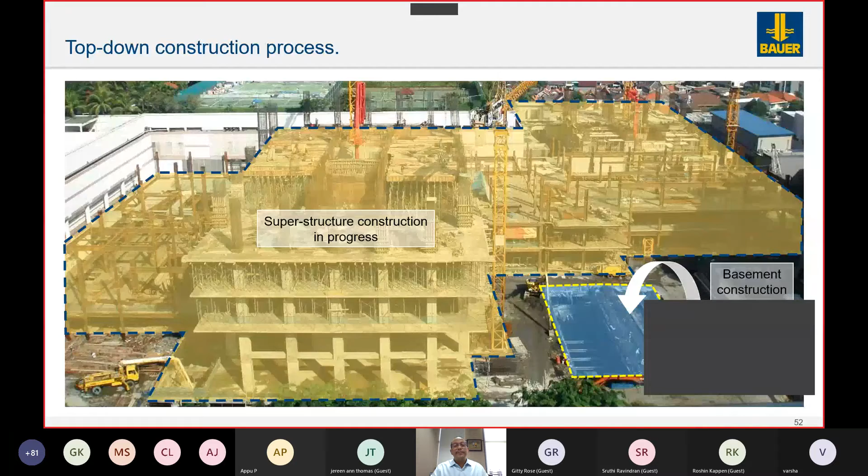And the other one, which is slightly taller. For some time, this used to be the tallest building in terms of height, not in terms of number of floors, because number of floors is never a consideration for the height of the building. You can have a shallow floor-to-floor height and you have more floors. But in terms of height itself, this building was one of the tallest until recent times, where another building next to this has come up, which is higher by about 20 or 30 meters than this.

But you can imagine there's such a big a tall building, which is 48 stories, completed in 36 months because of these kind of modern construction methods.

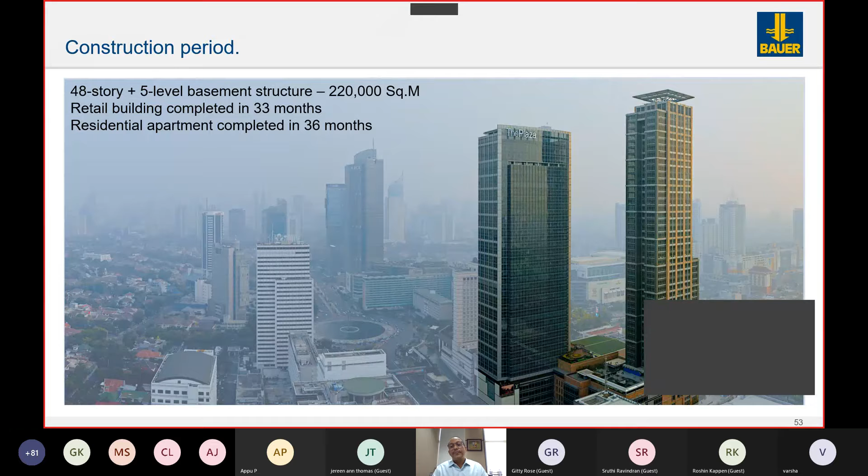So for me, I think this is quite a good method used in urban areas where traditional basement excavation cannot be done, because for example, if ground anchors are used, maybe you might not be able to drill ground anchors because your neighboring structure is very close. Maybe it already has a basement, so the neighbor would not allow you to drill holes into his property.

The other supporting system was the struts. Again, sometimes normal steel elements are not good enough to carry the load, so they need to be custom made and procured from the market. This is a cost item, production time, logistics, and afterwards maybe it has no more use unless it's on a rental basis. And sometimes in some countries used struts are not allowed to be reused until there is some verification process. So all these are unwanted headaches.

Whereas in this method, both the functions of a ground anchor or the strut are taken up by the slabs of the building, which were anywhere there, but they are given an additional responsibility of supporting the retaining structure. So the slab of the basement supports the retaining wall, and in fact I'm told by some designers the deflections by this method are much less behind the wall compared to the traditional way of using anchors or struts. Apparently this is a more rigid support than the anchor and the struts.

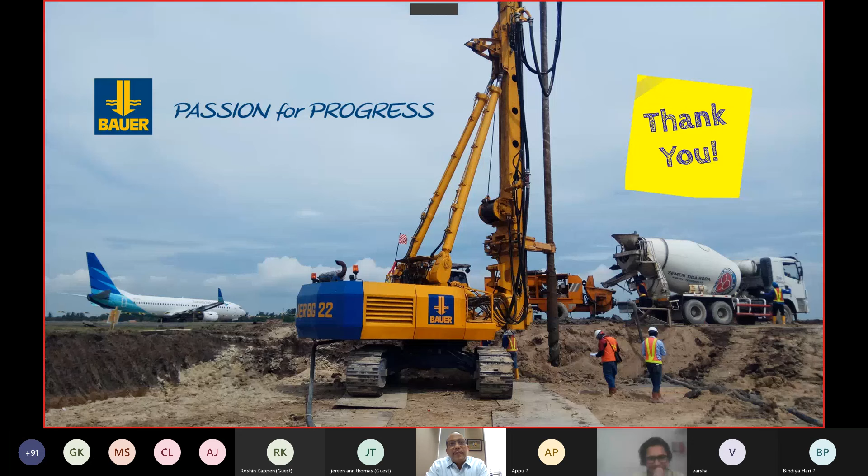Personally, it has been a privilege for me to address such an esteemed audience, and my special thanks to Professor Matthew and his team, who have done a great job getting connected with so many experts, who have given very good presentations. This program has been very well organized, which is like a breath of fresh air in these difficult times. Stay safe. Thank you.